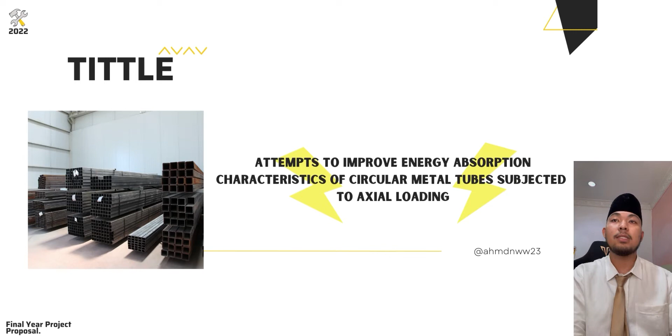So today I would like to present my final year project. The title of my final year project proposal is Attempts to Improve Energy Absorption Characteristic of Circular Metal Tube Subjected to Axial Loading. On this slide, I will explain the introduction of this final year project proposal. On the introduction, I will explain the title first. The title is Attempts to Improve Energy Absorption Characteristics of Circular Metal Tube Subjected to Axial Loadings.

As we can see, improve. What is improve? Improve is improvement, process, growth, goal, strategy, quality, and also efficiency. And energy absorption. What is energy absorption? Energy absorption is defined as the surface below the load displacement curve. As we can see in the graph below, we can see the load and the displacement. And what is characteristic? Characteristic is quality, cost, performance, duration, and productivity.

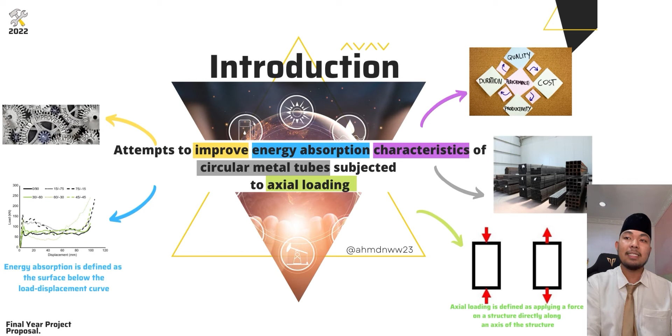And for the circular metal tubes, what is a circular metal tube? As we can see in the picture at the side, there are a lot of circular metal tubes, and subjected to axial loading. What is axial loading? Axial loading is defined as applying a force on a structure directly along an axis of the structure. Before I go further about this final year project proposal, here is the problem statement that I already identified.

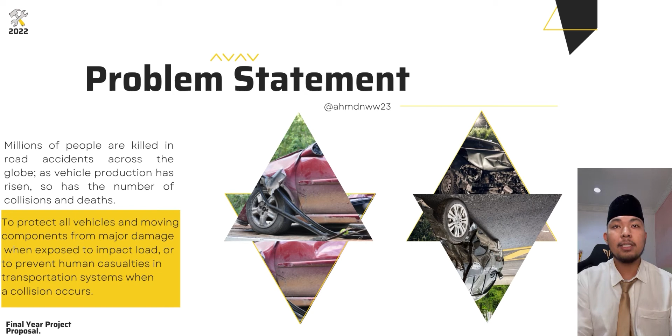Nowadays, millions of people are killed in road accidents across the globe. As vehicle production has risen, so has the number of collisions and deaths. So the problem that I identified is to protect all vehicles and moving components from major damage when exposed to impact load, or to prevent human casualties in the transportation system when a collision occurs.

Besides, Hanssen AG stated that several attempts have also been made to improve the energy absorbing capacity of metal tubes by using filler materials such as foams, wood, honeycombs, and metals. These researchers have shown that filling cylindrical tubes with foam eliminates their non-compact crushing behavior under axial loads and significantly helps to prevent global bending. Moreover, in comparison with empty tubes of the same size, foam-filled tubes are less affected by external parameters and are more stable while collapsing.

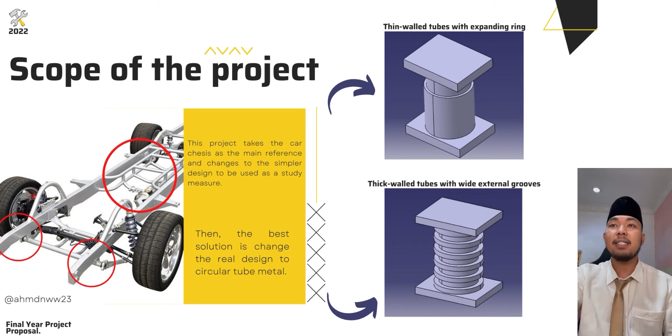The first design, as I already showed, is thin-walled tubes with an expanding ring. The second design is thick-walled tubes with wide external grooves. Okay, for this slide, I will explain the methodology of this final year project proposal.

So the first method that I use to complete this final year project is the quasi-static compression test. Both designs, the first design, which is thin-walled tubes with an expanding ring, and the second design, which is thick-walled tubes with wide external grooves, have to go through the quasi-static compression test.

These tests are used to determine the material behavior under a load. The maximum stress a material can sustain over a period under a load, constant or progressive, is determined. Compression testing is often done to a break or to a limit.

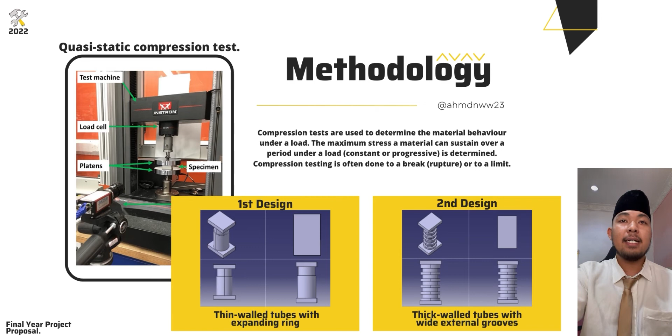I chose the first design because the thin-walled tubes are made of aluminium and steel, and the length of the expanding ring ranges from 1/6 to 1/4. The second design, thick-walled tubes with wide external grooves, is made from seamless mild steel tubes of commercial grade with an outer diameter of 60 mm and an internal diameter of 52 mm.

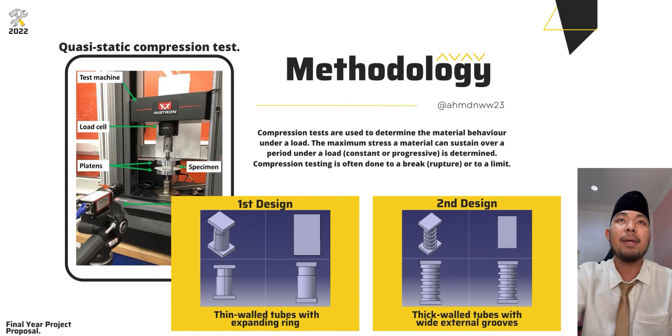Okay, for the second method, to make sure that the experimental value is correct, we have to compare it with a simulation method. So for the second method, I use an FEA model test, a computerized method for predicting how a product reacts to real-world force, vibration, heat, fluid flow, and other physical effects. FEA shows whether a product will break, wear out, or work the way it was designed.

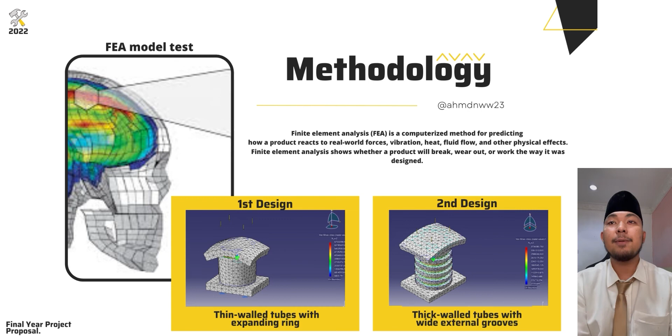So that's the first design, which I already ran through the FEA model test. And for the second design, we can see it after simulation. Okay, for the last slide, I will explain the expected results of the final year project proposal.

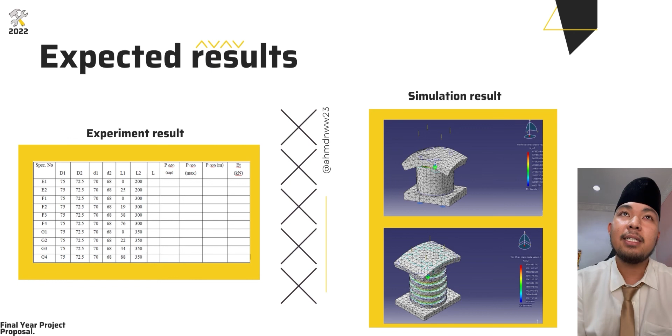In the first design method, a rigid steel ring is press fitted on top of circular aluminum tubes. When this energy-dissipating arrangement is subjected to axial compression, the rigid ring is driven into the cylindrical tube and expands its top area. Then, plastic folds start forming along the rest of the tube length as the compression of the structure continues.

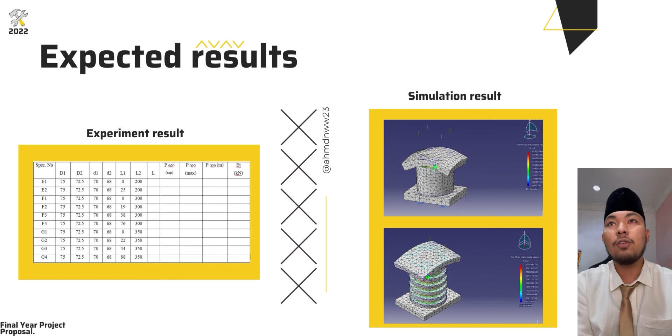In the second design method, wide grooves are cut from the outer surface of a thick-walled steel circular tube. In fact, this method converts thick-walled tubes into several thin-walled tubes of shorter length, assembled together coaxially.

When this energy-absorbing device is subjected to axial compression, plastic deformation occurs within the space of each wide groove, and the thick portions control and stabilize the collapse of the whole structure.